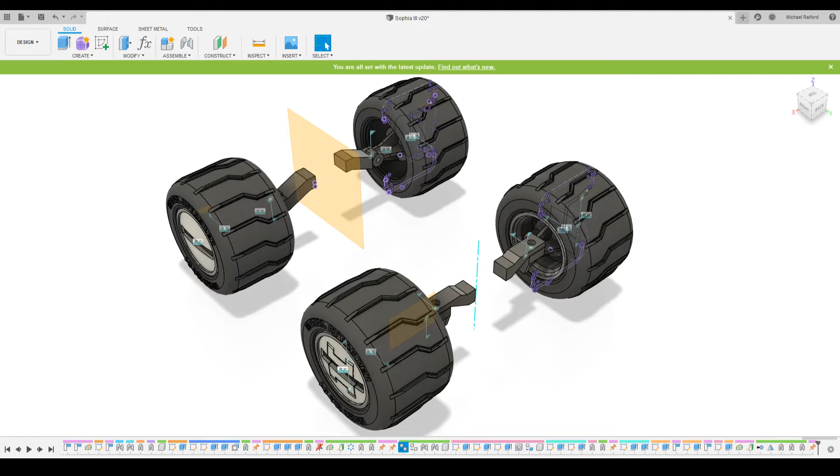Hello out there in the world. I am going to go through this all over again and kind of give an overview of what I'm doing. I don't know if I'll actually do any modeling at this point. I'm just a bit burned out, mostly because I spent an hour talking about this model and going over it, doing one last thing to button things up, and I just discovered that much to my chagrin, nothing happened. So we'll just start at the beginning here.

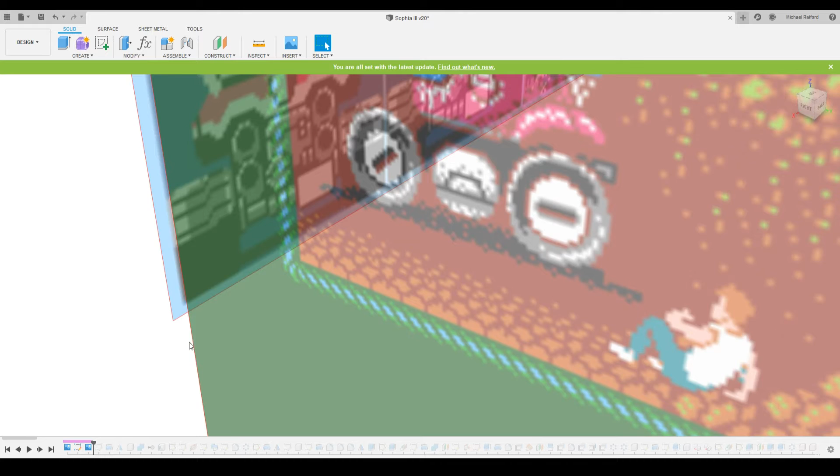I'll go ahead and show you these two canvases here. This is Sophia the Third from the Blaster Master game. I'm a child of the 80s, and this game really, gosh, of all the ways I could waste my youth, this game was it. I spent so much time on this game. It's unreal. Loved it. Super difficult game.

I might do a let's play of this eventually, but it will be cheaty, because yeah, I played it legitimately back in the day, and let me tell you, multiple restarts from the very beginning because you've only got like 2 or 3 continues after you've exhausted all your lives, and it's painful.

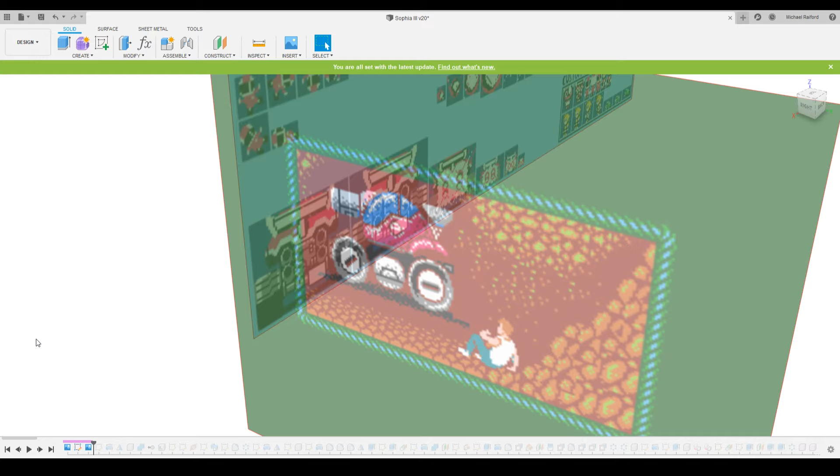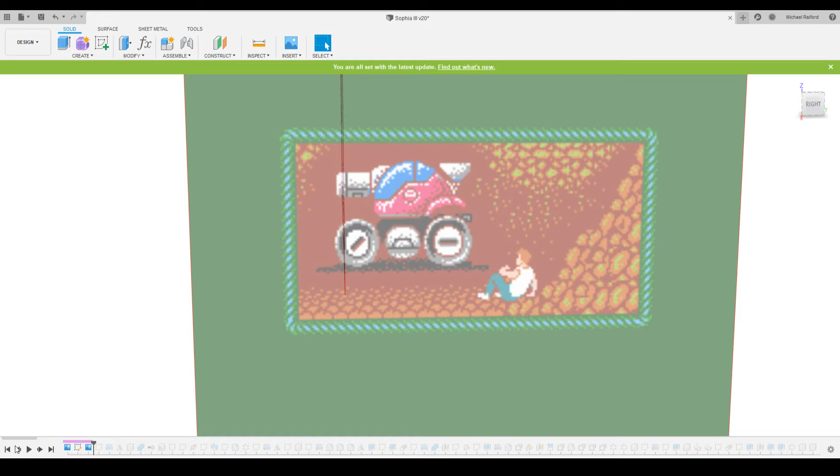But anyway, so this is the vehicle that I've been working on modeling. I've got the wheels done, and I'm going to start working on the chassis, and I'm going to run through this here, and you can see, here's the tire being modeled. I'm going to go ahead and turn off these canvases so they're not in the way.

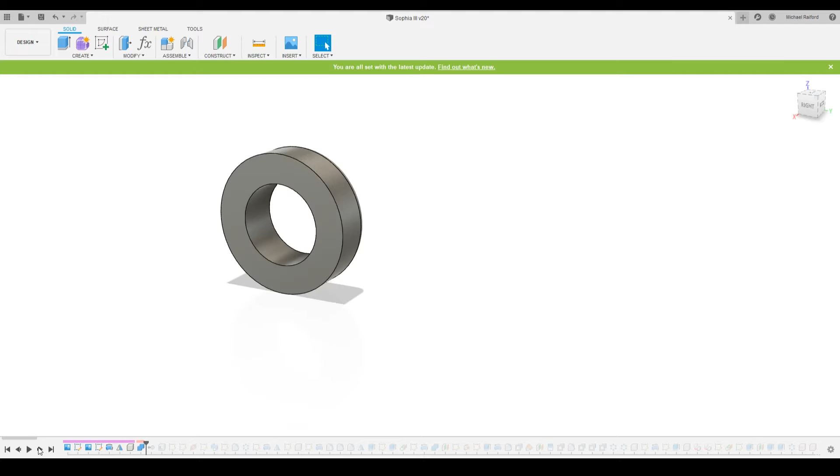So this is the very beginning of the tire. Kind of step through that. That's half of it there. I think that gets removed, yeah. I'll go ahead and re-show that, and I think the hollow, yeah, so it started out as this solid block of rubber, and the next step was to basically hollow it out. So now it's like an actual tire, and this actually fits on the rim.

And when I'm 3D printing it, I really wish I had a way of setting up a camera so I could show you some of this stuff after I've 3D printed it. The material I'm using for the tire is TPU, about 2 millimeters thick, and at that thickness it makes it firm yet squishy, so it's got a really nice feel to it.

This isn't going to be an RC model. I don't have the engineering chops for that at the moment. So it's going to be basically a visual kind of plastic model type deal, where it's just a showpiece to look at. But there's going to be pieces that'll actually roll on its wheels, and you'll be able to manipulate some of the parts, like putting the wheels in different configurations.

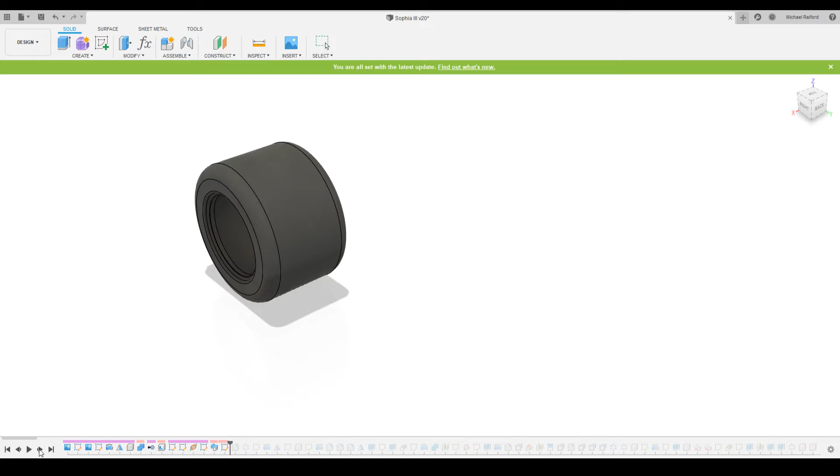So anyway, that was this. So this is the tread design. And if you look at, where is it, I think this one here from the back, you can see that it very closely matches what the tires look like on Sophia the Third. It looks like it might be grooves, but I think it makes sense to me that they would be out.

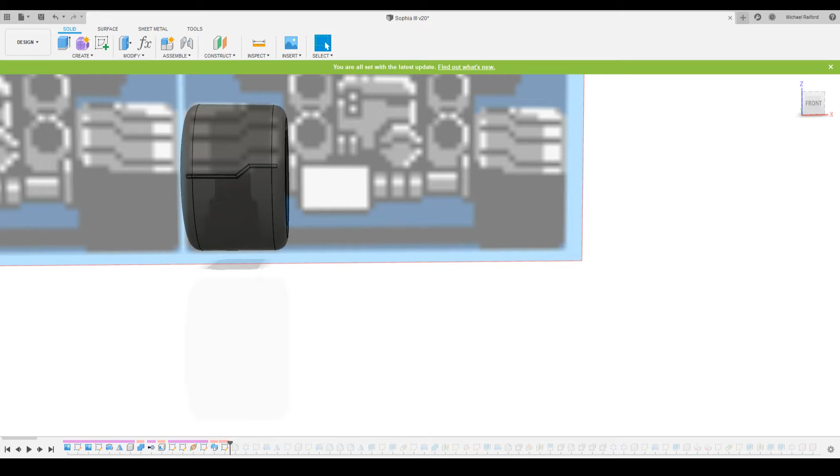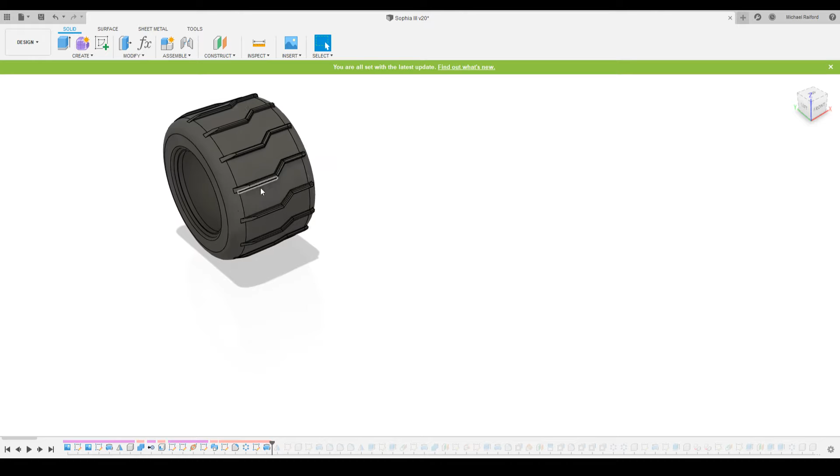Anyway, so that's that, and then we go through and do some modifications to that. So now we've got the circular pattern, so now the tread grip is around the entire tire. Then I created a sketch, and essentially what I did was... I don't know why, let's see, it's just technology sometimes. Okay.

Let me go home it again. Okay, so I don't know why that is. It gets really kind of... It's been acting a little bit weird since this last update.

It's been acting a little bit weird as far as navigation is. I don't know if they changed something with that, but what I did here was I basically blended the tread into the sidewall of the tire, and I'll go ahead and show you the regular shaded without the line, so you can kind of see how it blends into the sidewall there.

And then there's a mirror, so it blends both ways. So now it looks a lot nicer. It's not sticking up at the edges. It actually feels more like you would expect for a tire tread.

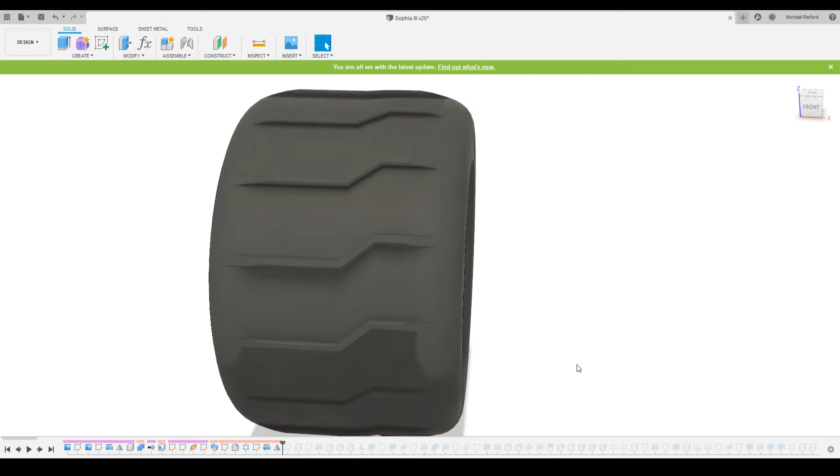I'll go back to the visible edges only view. So continuing on with that, we're building up the rim here, so you can see kind of the profile that I'm going to use to make the rim. There's the first half, and then mirrored at some point somewhere.

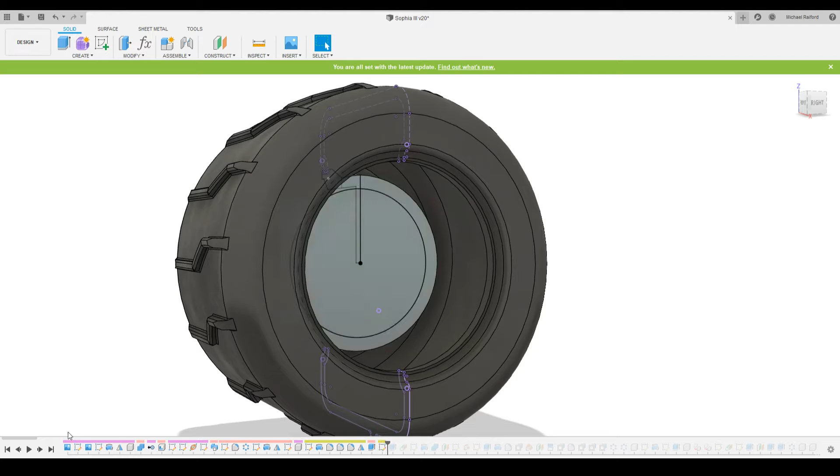There's a bunch of fillets, and then I mirror. And I don't think I have both - yeah, I have one of the bodies turned off. So you have this, it's mirrored inside of there.

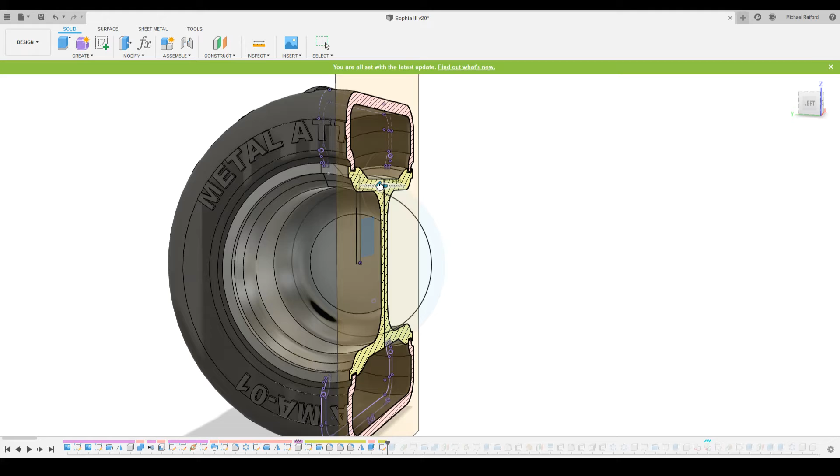I'll turn on the section analysis, and you can kind of see. I want to edit that and move that section plane this way a little bit. So yeah, right about there. It's actually centered on the... there we go. So you can kind of see how the tire fits on and everything.

The tire fits in the groove, and it actually pops on fairly easily because it's a soft material. It's a TPU material. But anyway, this goes a little bit further in that there's a...

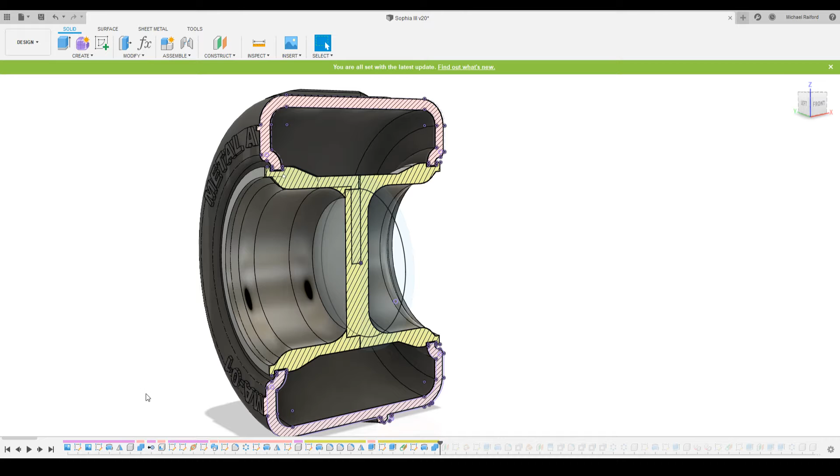Let's see, I think here it shows. Okay, so I've cut out the boss on this side, and there's a little boss here, and this part fits in, and on the side of it, I don't know if it's there yet. I'll go ahead and turn off the sectioning and turn off the tire.

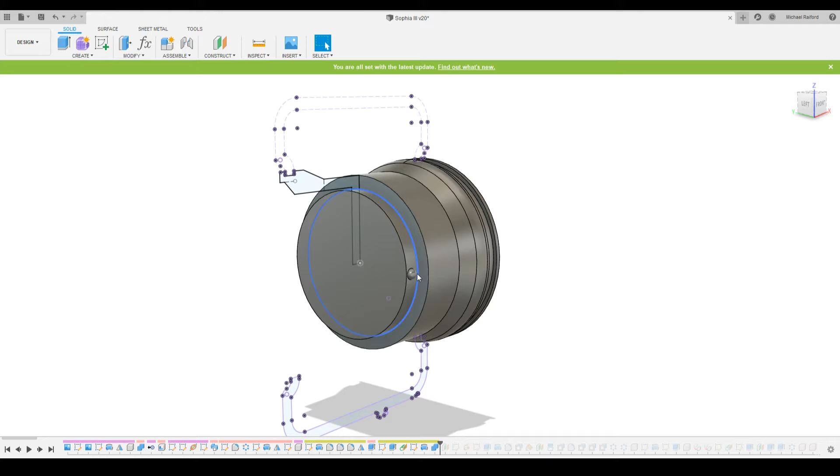You can see you've got this little part here, little tab here that sticks out, and on the other side of the tire I've already done the cut out for that tab as well, and that's going to be extended out. So it's got kind of that L shape, so you can actually lock it.

You push them together and you lock it and you twist it, and it actually locks together so they don't pull apart. So assembly without glue is kind of the goal with that piece.

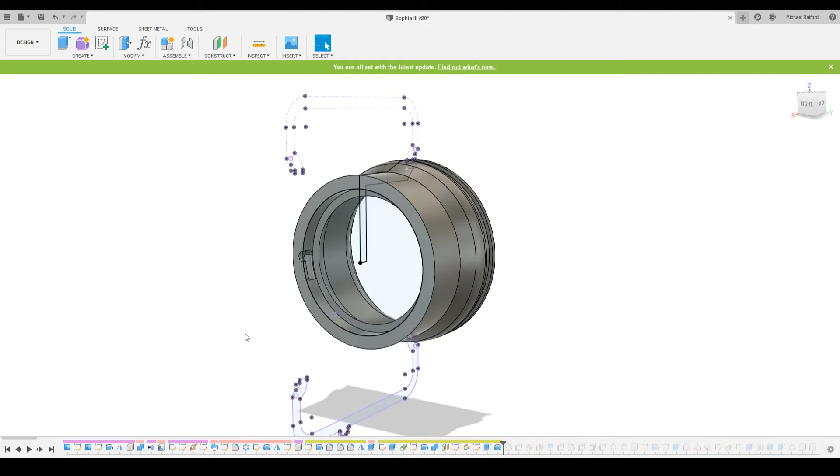I don't know if I'll do that throughout the entire thing, but for this, yeah, I wanted it to be easily assembled. The idea originally was that you could slip one side into the tire into the slot on one side and then push the other one in, give it a little twist.

But it turns out you can't really twist it once it's on that tire. It grips too strongly onto the rim, which is a good thing, even though it's not powered.

But it turns out that it's just easier to take those two pieces, twist them together, and then drop the tire on like you would on any other rim.

So go through there, and eventually we're doing a bunch of offsets. There's a ridge there to kind of keep it once you've turned it. And then we do a circular pattern so that you get - that was for the detents - and then the circular pattern here, which gives you this

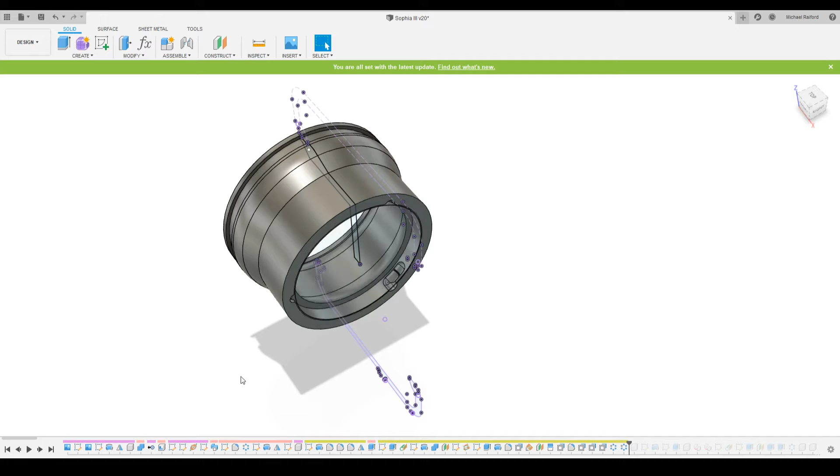twist lock to hold both sides of the rims on, just 3 of them. So 3 just seemed like a good number to use there.

And moving on, I'll go ahead and turn on the other side here so we can see that's the entire rim. There's no hole through it yet or anything like that.

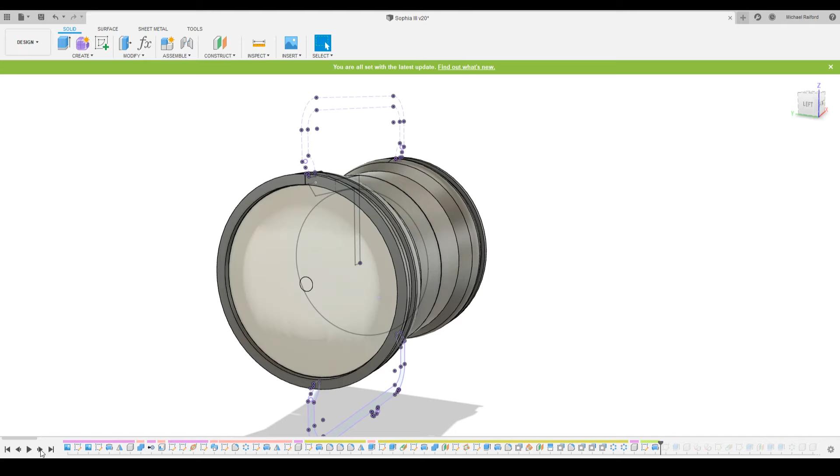And then eventually we build the hubcap. These hubcaps have a distinctive piece on them, which is this little groove in here. It almost looks like the top of a flathead screw.

Hopefully this thing is actually streaming out this time. So it actually looks like the top of a flathead screw, and that's kind of how it looks in game.

So moving right along, and I'm rushing through this time. Last time I spent a good amount of time just talking about it, but I can't be bothered. Let's see, what in the world?

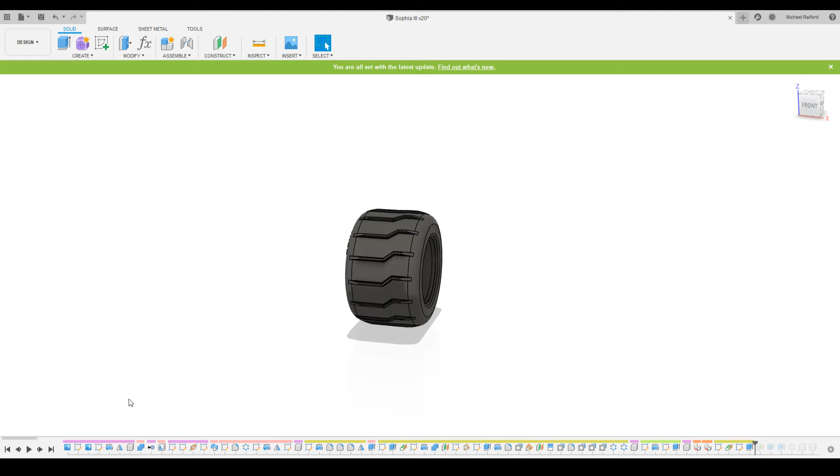At some point, some of this goes on to the other side. I don't know why the rim isn't showing. Oh, there we go.

So some more steps here, and at some point the second wheel and tire is being created here because there's a copy operation in it. When it did the copy, it copied the entire history.

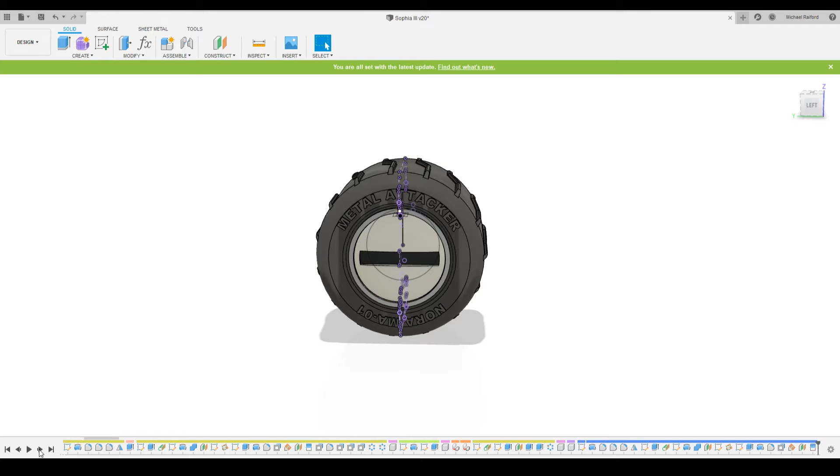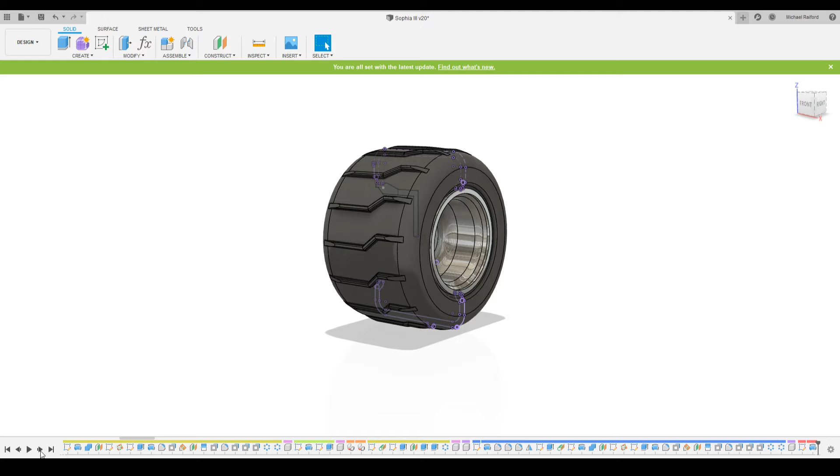So let's just go through that and see. Keep going. I'm not sure where we are now. Let me see, the rear. Let me close up the front so we can see what's going on here. So this is the rear rim so far, and we'll just keep stepping through the history to see how this works out. There's a lot of sketching and stuff like that.

And let's see, hubcap. Okay, there we go. So we got the hubcap now. The rear hubcap is different, which is why this rear assembly is completely different. And there's another difference you'll see later on too.

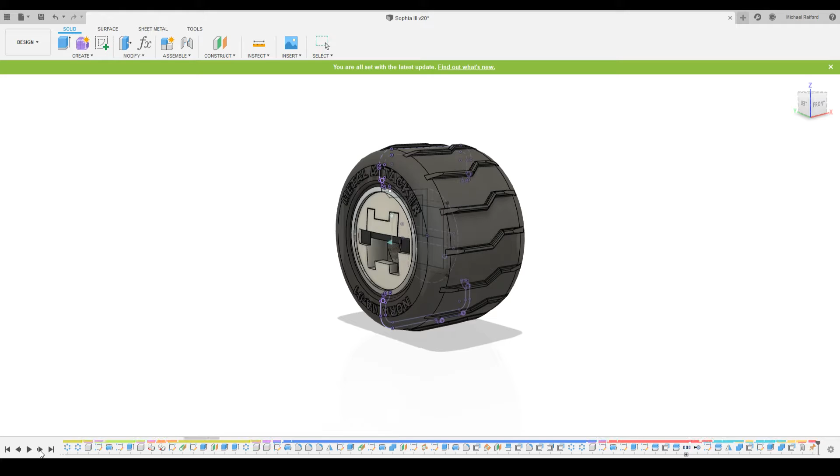And we put the little barn doors in so that it can flip open when it's in its dive configuration. Here I am building out the hinge for this, and as soon as this joint is made I can actually show you that. So these just sort of flip in and out like that.

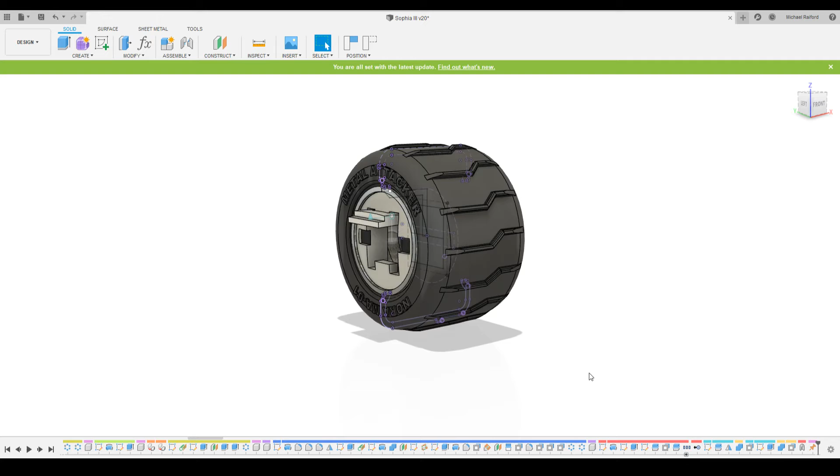So in the game, when the vehicle's in its dive configuration and you're running around in the water, these two flaps open up in the wheel, and you can see them. If you'd see the profile of the vehicle like this, you'd see the little flaps sticking out of the back of the vehicle. That's supposed to emulate that.

So I'll go ahead and revert my positioning on that so I don't mess anything up. Going through, and eventually you'll see that it's flipped out.

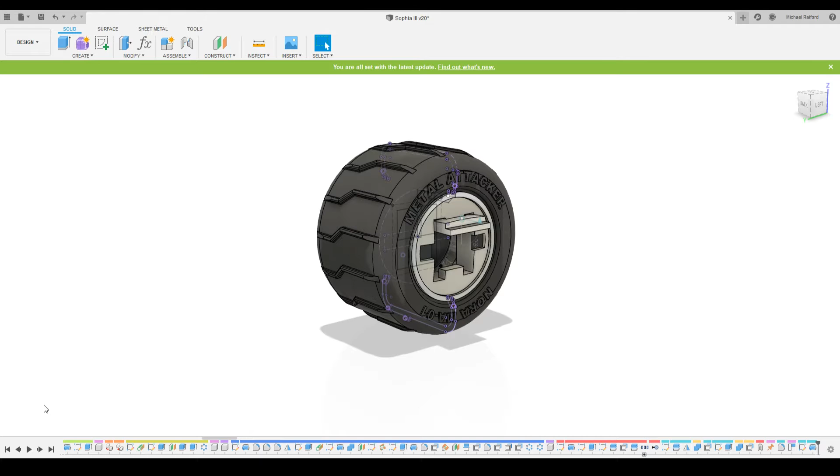What I'm doing is, if I hide this upper, you'll eventually see. I am making a mark for the detents that will hold it open and closed so that they're not just flapping, so there's a little bit of retention there.

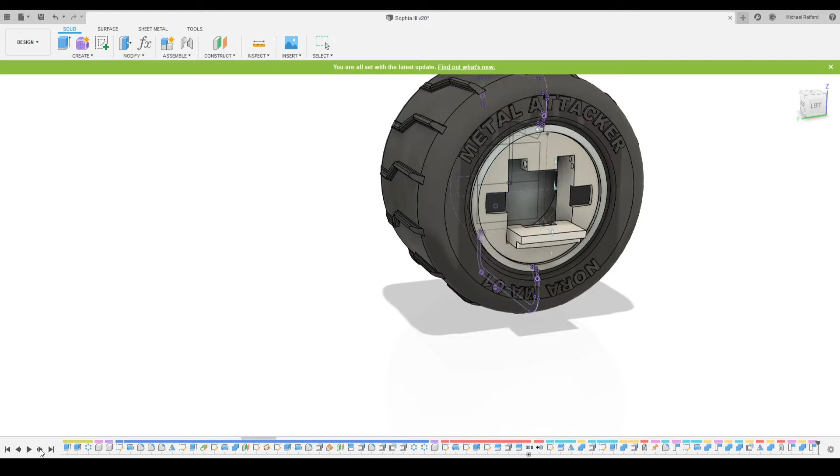And you'll see I've got the marks on the sketch. I've got the bottom side, and I think -- are these? I think these are, yeah, that's already cut out. So that's all cut out.

And you can see the hinge is actually print-in-place, which is something I've not done before. And when I did the 3D print to test if this was actually going to work, it actually worked out really well.

So continuing on, offsetting some space to give some faces clearance. Also, on the tires I've embossed this -- all tires have this embossed branding on the side. So I decided to go ahead and put this labeling on the outside of the tire.

So in the later games like Blaster Master 0 and 02, they call these vehicles metal attackers, so that's where that came from. And then of course Nora MA01, which is the thing that shows up on the pause screen for Sophia the Third in the original Blaster Master game.

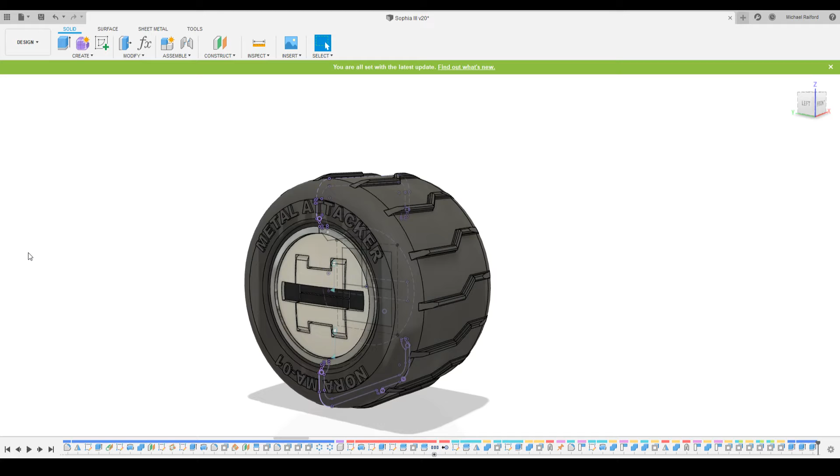So continuing on, what are we doing here? Where's this extrude? Oh yeah, let me hide the tire here. Tire. Let's see. It's the front, it can get a bit confusing. Tire. Okay, so inside here, let me go back a couple of steps.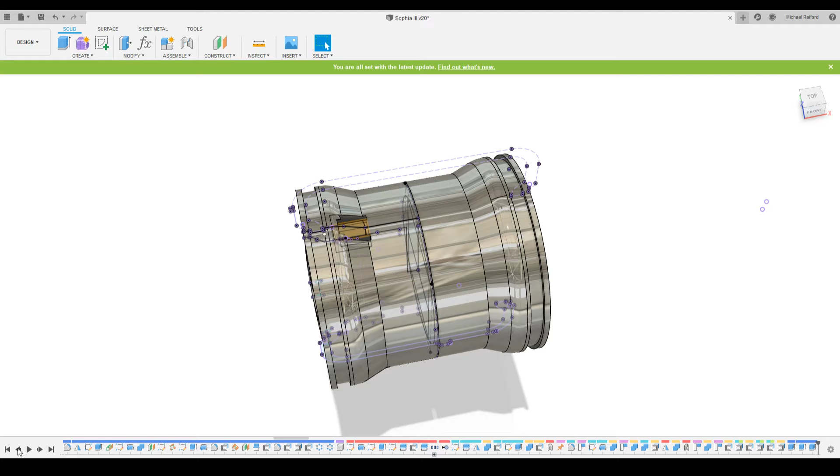So this hubcap -- if I look at a section analysis here -- this hubcap has a little ridge that goes around. You can kind of see it in there. There it is, right there.

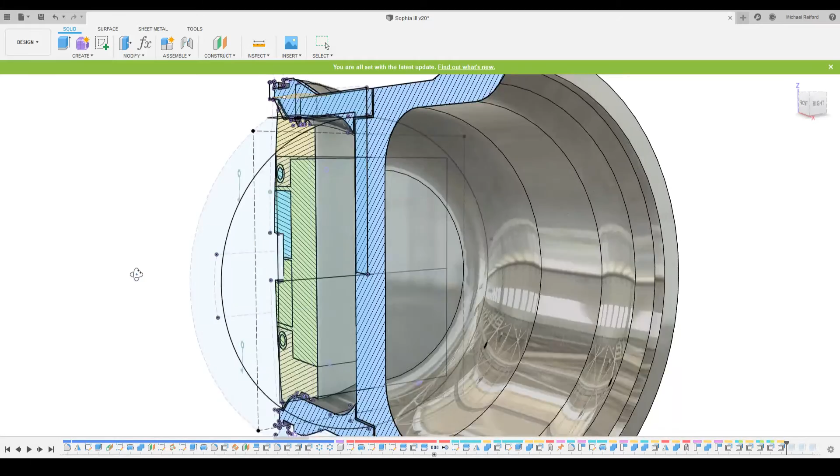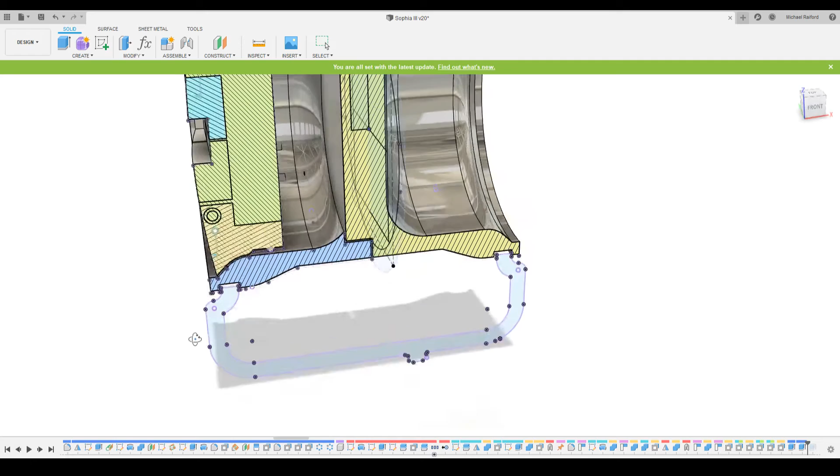And the idea with that is that this has a little tab, and these tabs, if we go back here, you can see that these tabs are kind of separated from the body, and they're a little bit thinner so they're not too thick, so they have some flex to them, and that is what's used to retain the hubcap.

So you can actually pull the hubcap out. You can click it in there, and again, no adhesives necessary. It's got a very positive click to it, so it holds really nicely. Let me go ahead and turn this sectioning off.

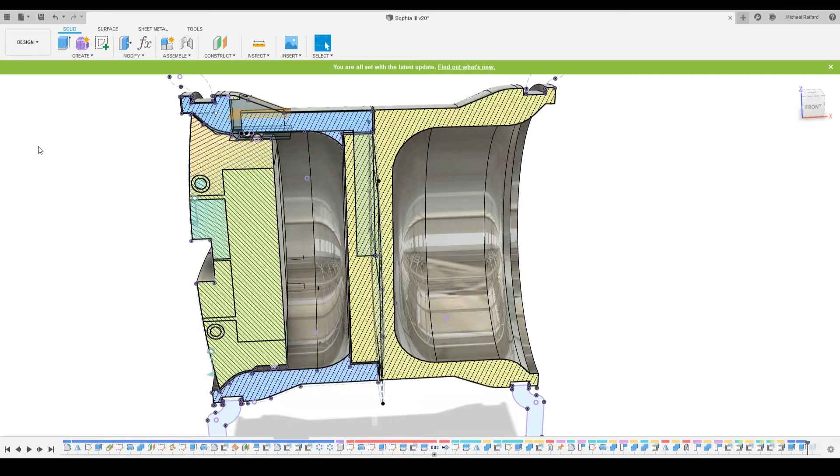So got that done, and then moving further through the history here. So what is going on here? Let's see, that's the tire. Okay, so front rim assembly, hubcap, frame, upper, lower.

I think this is, yeah, this is all the other -- I think this is for the rear side of it. Let's see. No, that's the rear hubcap, that's front. Let's see, we'll hide the front for now.

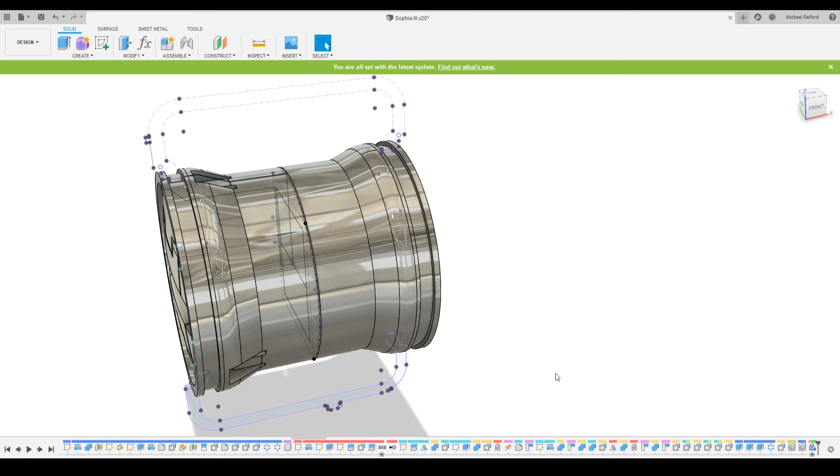Left or right? I'm losing it. Okay, where are these holes going? Oh okay, that's the screw hole. So yeah, now I've bored the hole through it there. So capturing some positioning.

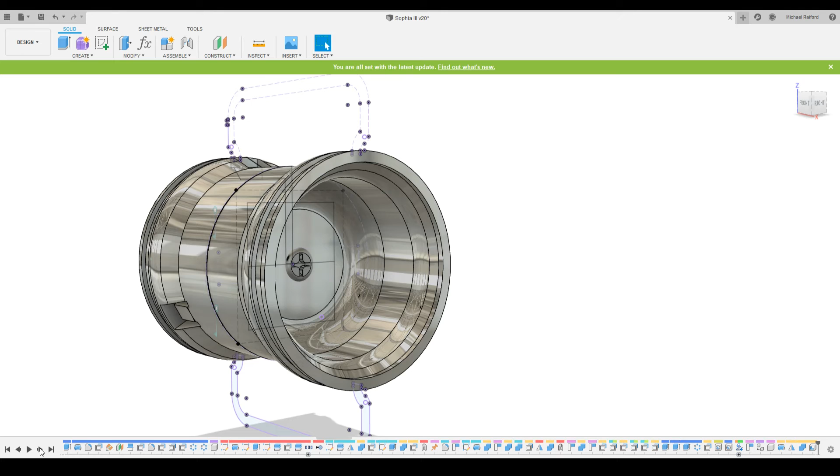Let's revolve -- what is this? Okay, so this is now we're doing the new tire. There's the new tire. Moving forward, kind of the same deal. And you'll see the reason why I am recreating the tire here -- there's the lettering on this tire.

And just keep going. Sorry, my voice is just all of a sudden really crackly.

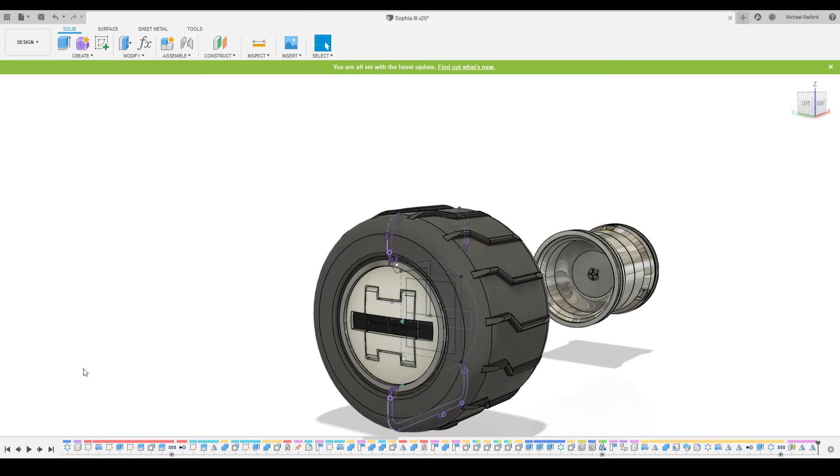Okay, let's see, so that's the right tire, left tire, not quite there yet. Okay, so we continue. Let's get that front rim on.

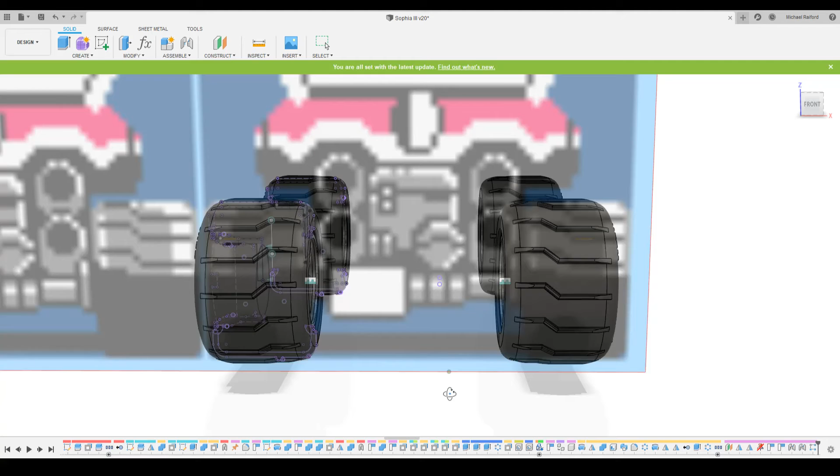Okay, so now we've got the four tires. You may have noticed it on the canvas of the Sophia the Third from behind. The tires are going right through that at the moment, but you can see it on this sprite better. See how the tread pattern is actually mirrored.

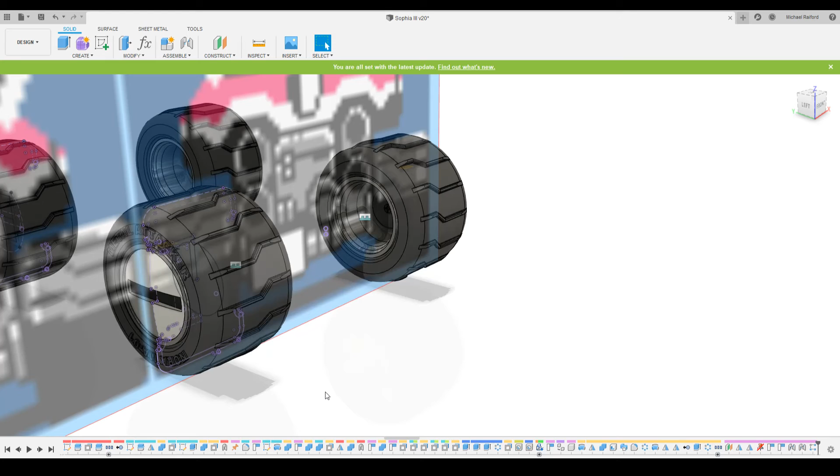Now, if I mirrored the tire in its entirety, the wording would be backwards. So the wording actually had to be rotated around and reapplied 180 degrees on this side. That's why I didn't directly mirror the tires, so the wording looks right on it, as well as the tread matching up with the actual thing.

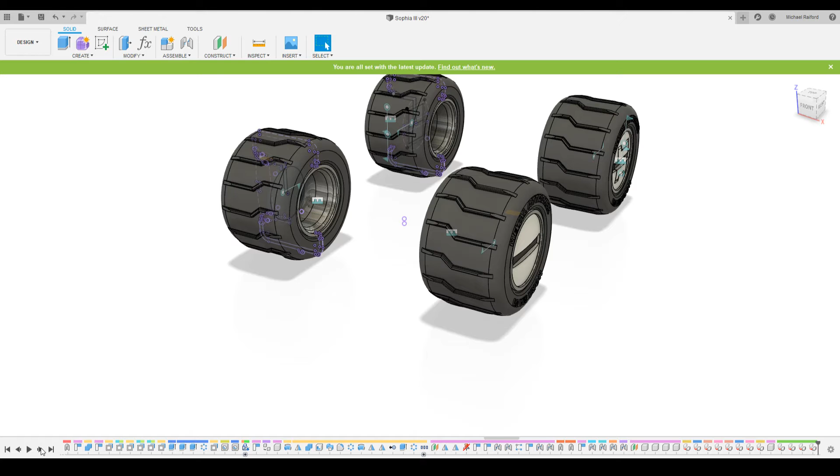And so continuing, it's more a lot of getting things jointed, capturing positions, got the screws, getting those with revolute joints on the wheels themselves, more and more component organization there, and getting the hubcaps on the other side.

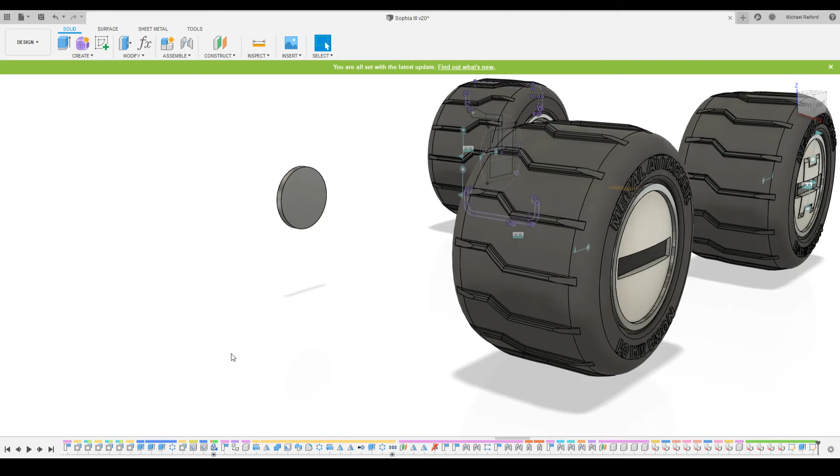I think now we're doing the little hub in here, so let me go back to wheel, front right. So this is the hub as it's being built here, and there's a little boss for the screw to go into, and then the screw. I tapered it a little bit, give it a little bit of draft just to give it a little bit more strength on the base.

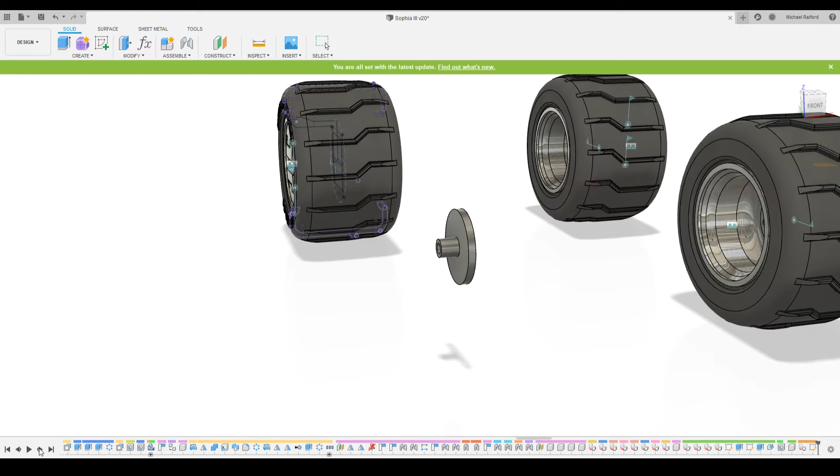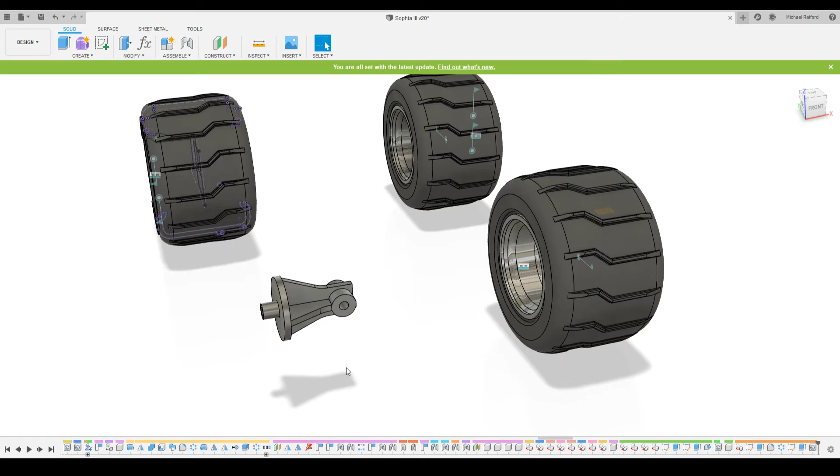So keep going with that, and eventually this thing is basically just these four little fin shapes coming out, so it's strong yet light, and then a little boss for the screw. There's a self tapper that will go into this, and part of that will get cut off at some point, some fillets, and some more adjustment here, and then I've got a mirror plane, getting the hubcaps all taken care of.

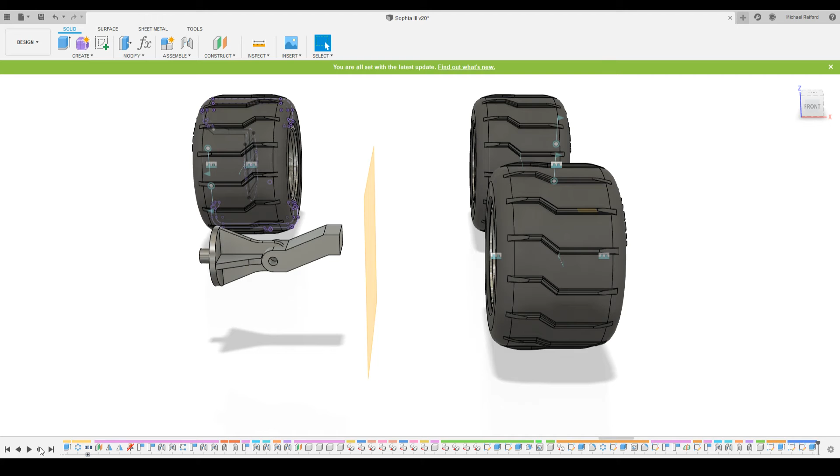And there's an extrude there, but I don't see what it extruded. Okay, let me go back. So we missed something. Okay, so right here you can see I've taken half of that boss away so that there is a space for the next part, which is this arm.

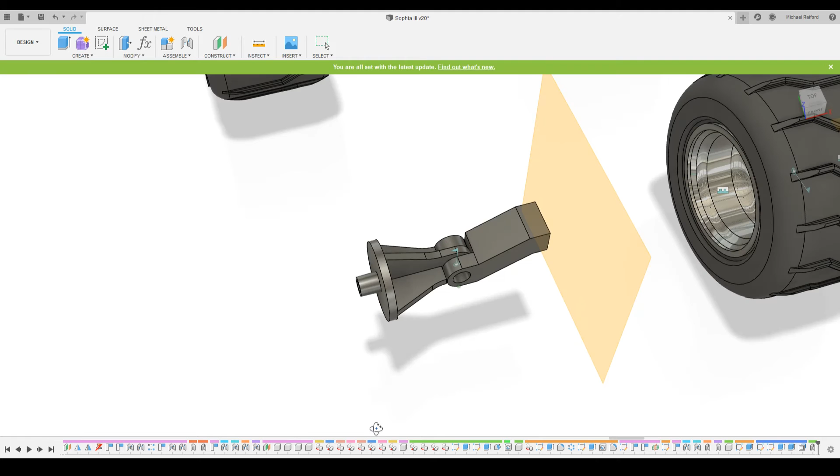There's two extrusions to make this arm. One is the basic shape, and then the other one makes the cutout so that it lines up and attaches, and there will be a screw that actually holds that together, widening the hole so it doesn't have to drill the threads through that, because I don't want both of them to be threaded. I just want this side to be threaded. And all the screws I'm using are M3.

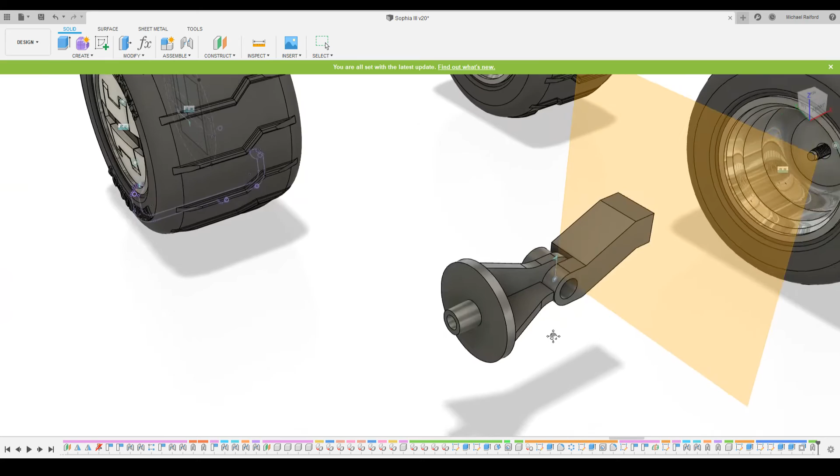And here we go again with frustratingly slow. I don't know why it does this. Let me rehome again, and then, now I can rehome, zoom in, and I'm fine. But for some reason it gets really slow all of a sudden. So just—

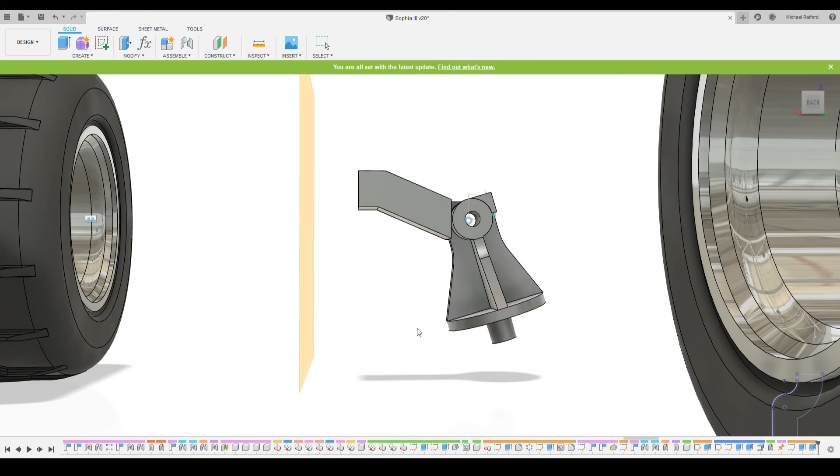These extrudes are the same. Okay, so on this side I'm actually adding physical limits to this joint, and I don't know if I've got it set. Yeah, so I've got the joint limited in software, but I'm adding a couple of pieces here, like this block here, to keep it from going any further up.

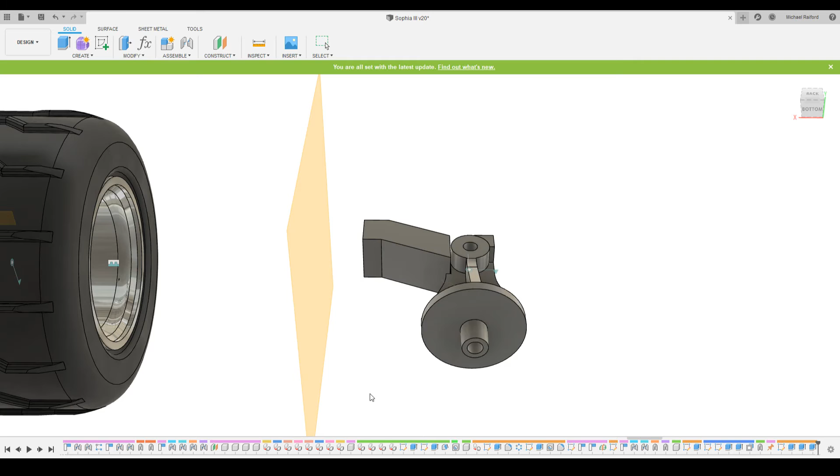And then there's a block that you will see, it's actually already kind of there, but you can see that cuts in, so I need to cut out a piece there, which is what that next extrude does, is it cuts that piece out, so that just slots right in there, and that keeps it with a 90-degree range of motion. So there's that.

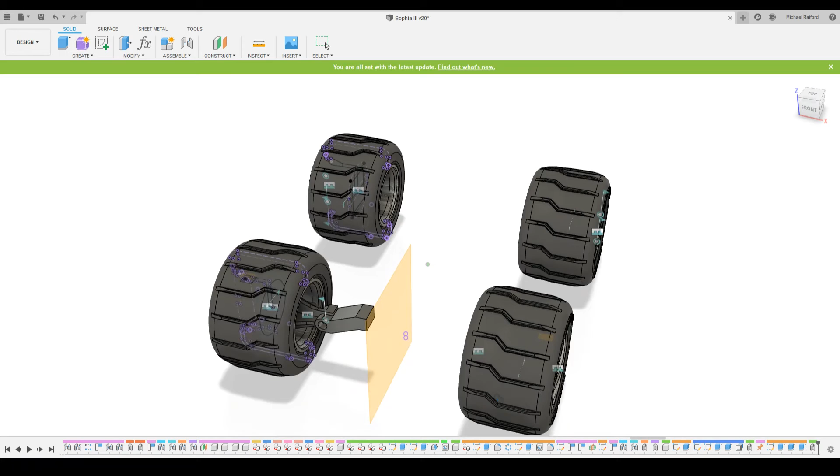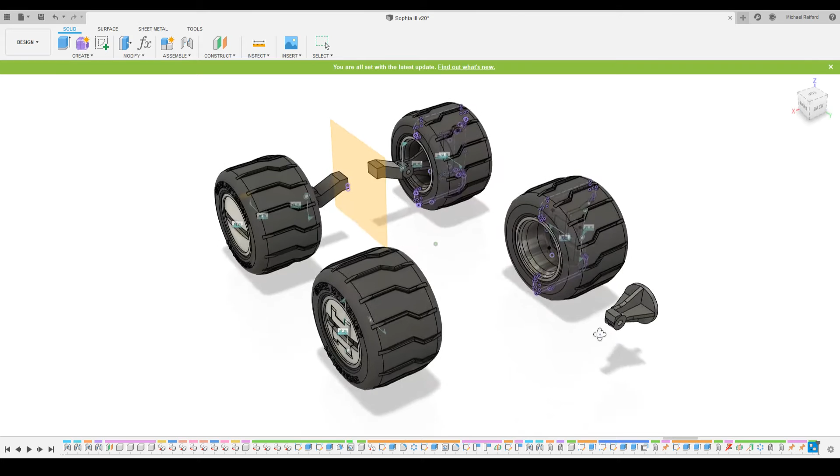And so more joints. I'm going to go ahead and turn back on that wheel assembly there. So that's one part of the chassis, and then using a circular pattern, I duplicate that over to this side and do some more joint setup, and I'm grounding things again. And then I move things over to the back and start putting things together in the back.

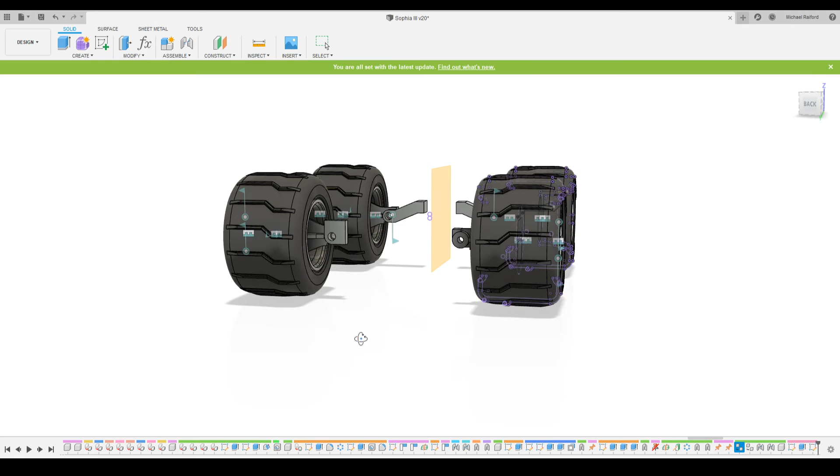Very similar process here, making sure everything's jointed up. I did have a joint that wasn't made in the back that I wound up having to remake. So then this piece here is very similar to these arms in that it allows the vertical rotation of the wheel so that it can be pointed down, like when the vehicle's in hover position.

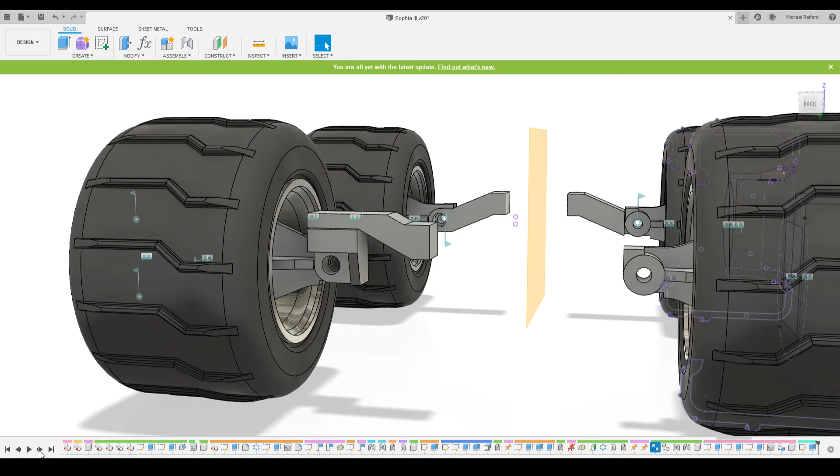And this basically has the same kind of range limits. Just kind of making this piece out. And so this top piece here is the horizontal rotation, which will allow the wheel to swing back.

So it looks like it's in the dive configuration. At some point I add joints. There we go, there's one joint, there's another joint. We got all these joints set up, and there were a couple of extrudes on this side, this pin here. I think if I drive this joint here...

So at 0, this pin here will prevent it from going any further forward, but this needs to be modified, and you'll see how it gets modified. So we modify it, and then at this point we capture position with the turn back, so we can get the other limit on it. So that limits it from going too far the other way around, and we move it back.

So now the limits, if I click on this again, you can see that physical limit is kept by that one little tab that sticks out there, which keeps it from spinning too far. I'll go ahead and undo that.

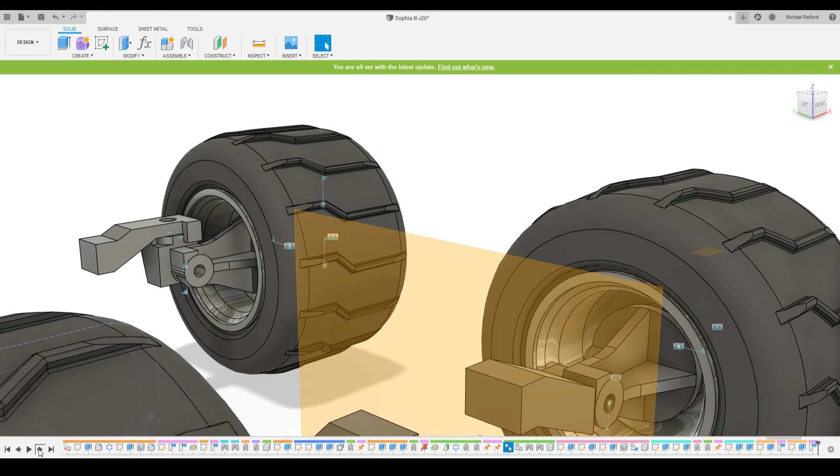That was the point I was at before I started the last stream, because YouTube decided not to actually stream for me. So this is what I did during that live stream that was never actually live.

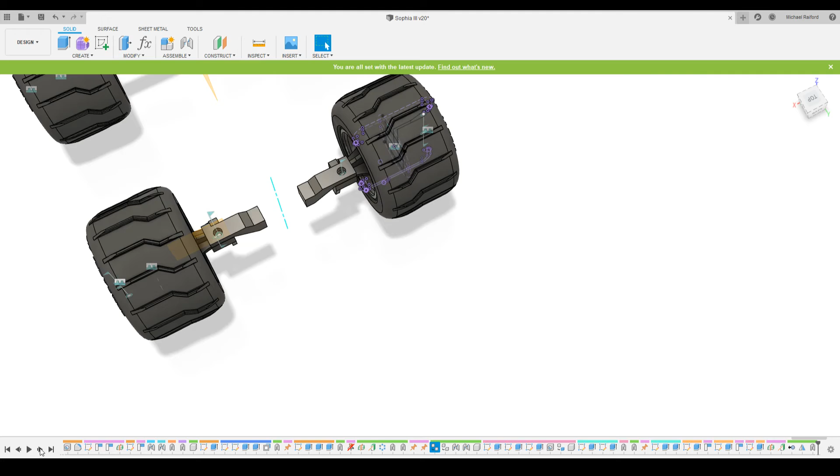So I made a mirror plane here, and I thought I was going to just rotate this around. Well, it turns out that wasn't what I actually wanted to do. You can see here, whereas the other one is rotated, because there's no directionality front or back, you can do that and it's fine. But on the back here, you actually have to have these swinging toward the back, so I had to make sure it wasn't a rotation, it was the actual mirror.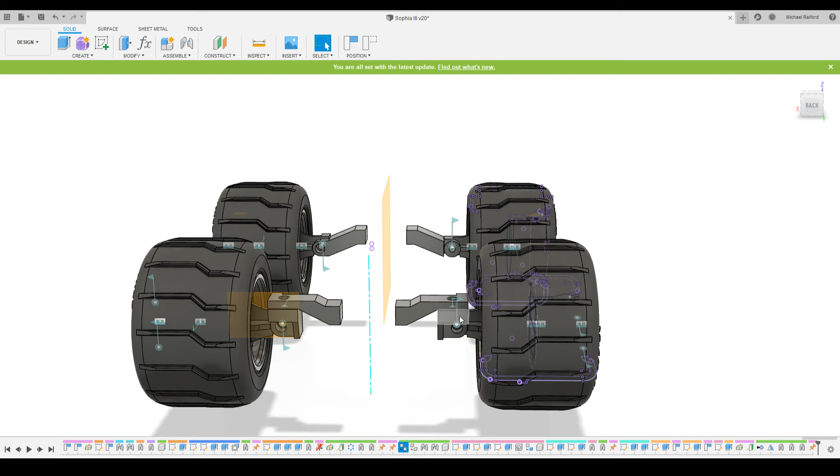So I got that mirrored, and then added all the necessary joints and grounded this piece. You can grab the wheel here, grab this little thing, and these will now flip back, as you can see. I'll go ahead and revert that, and they will also flip down. Oops, grab the... see, can I make it flip down, please?

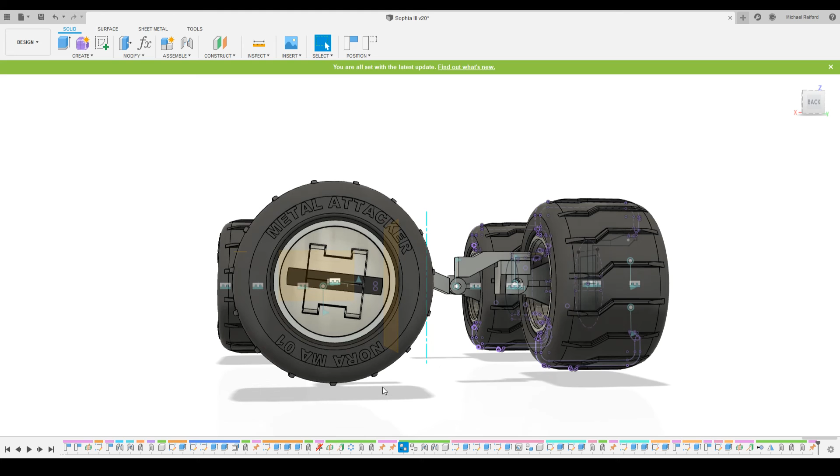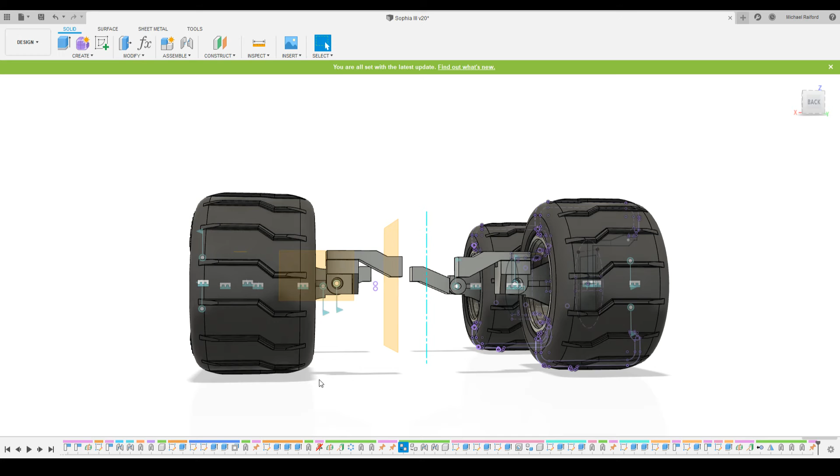No? Oh, revert. I'm going to have to drive that joint by myself. So, yeah, you can make it flip down. See, can I actually grab this one and make it flip down? No. See, now they can all flip down or flip toward the back. That's where I was when I thought I was actually streaming, but I wasn't actually streaming.

So, sorry for the kind of hurried, rapid pace fly-through of everything.

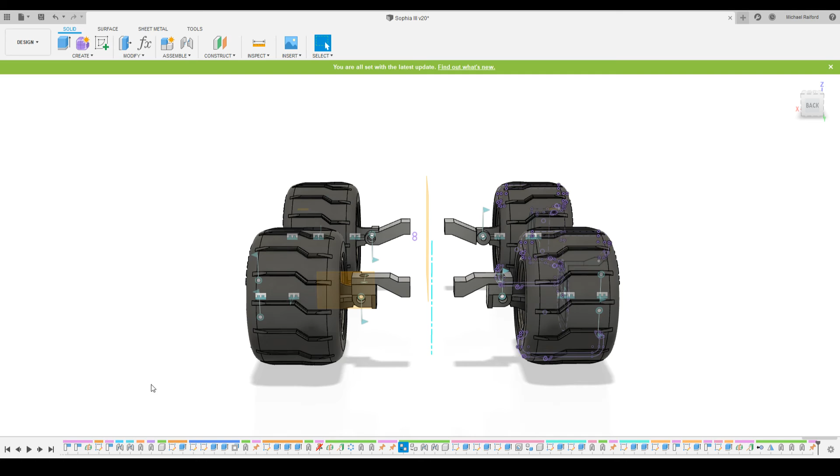But yeah, so this is where things are right now. Eventually, I'm going to get the backbone here. There's going to be a set of arms that come out, come up toward the middle, and those will allow the wheels to swing down and up.

I'm thinking about maybe making a mechanism that keeps the front and rear sets at the same angle, same degree, by using something like a set of teeth, basically a partial gear that would go in this area that would allow them so when I pull down on one, it pulls down on the other. But I don't know, that's a little bit more involved.

I might just leave it so that the front and the back are separate, so if somebody's picking up the model and playing with it and they manipulate it, they can make it so the body points up or down. I don't know.

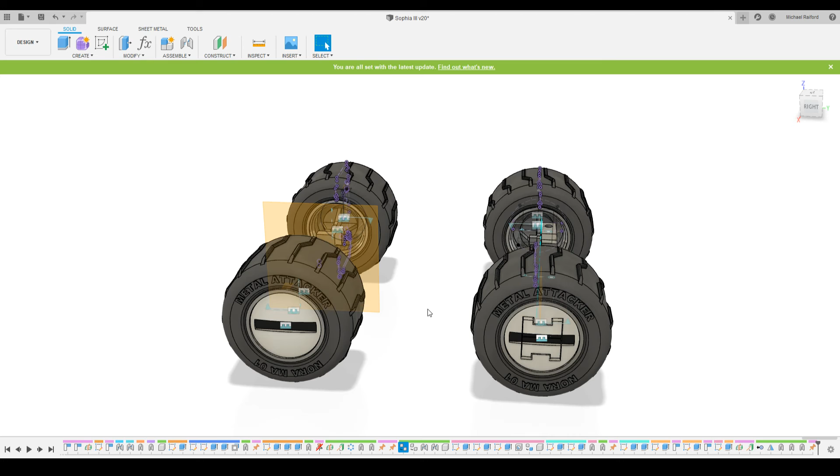Let's see, there's also a consideration on the rear of the vehicle. I think that's this one. When these back wheels are in their down position, I have to be careful about the top exhaust pipe. I don't think that will be a problem. Let me do it orthographic.

Now the top pipe won't be a problem, but this bottom pipe, I'm going to have to give that some thought because I think that might interfere a bit.

I don't know, maybe there's a way I can get around that. It's not going to interfere by much, and I might just be able to fudge the sizing of the pipes a little bit so that they don't interfere.

Then as things go on, I'll be doing the bit of stuff with making the axles and stuff. So it actually looks like it has that little axle that shows up in the back, and then the back of this thing, and all the little gadgety type things here, and then building the body on top of it, which has good clearance between the wheels and itself, so that's good.

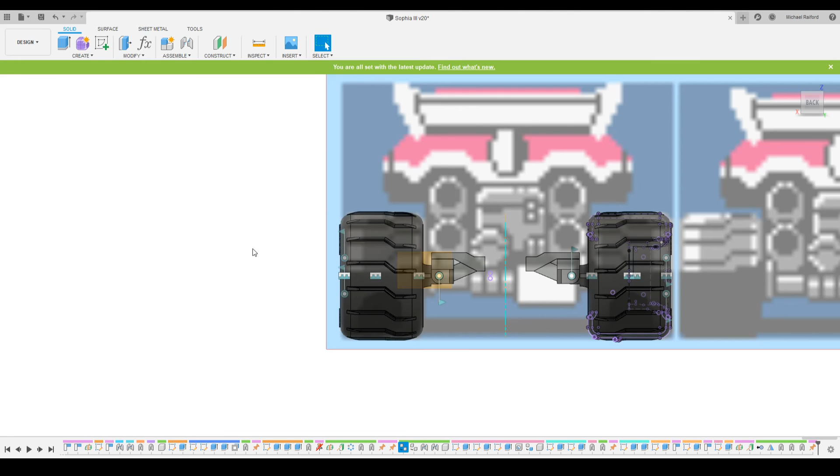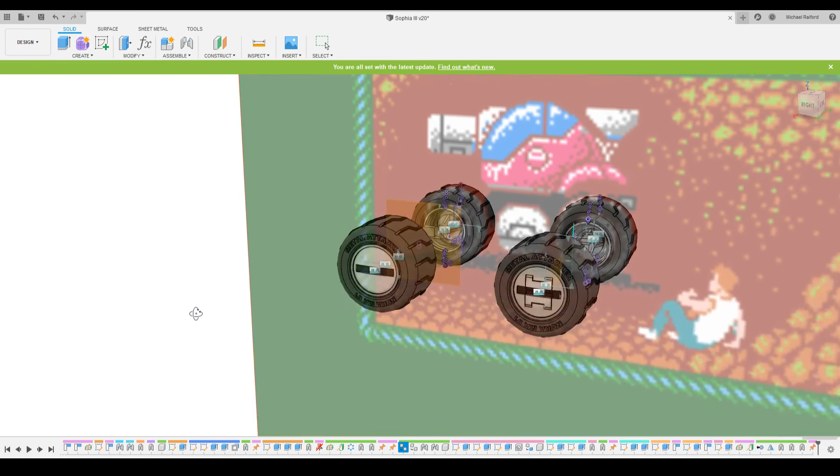And this isn't going to be a remote control vehicle by any means. Like I said, the mechanics of that is, I think, probably a little too involved for what I'm doing and my level of skill at the moment. But it'll be a pretty cool model that you can pick up and kind of play around with.

But man, it'd be so cool because I know there's a company out there that makes little RC cars that can run up walls and on the ceiling. It would be so cool to have wall-climbing ability on this RC car, and the hover ability too, and then some kind of water propulsion system.

I'd imagine the wheel design would change a little bit in the back, so that a turbine and the wheel could spin and draw the water through and give it a little jet of water to push it through the water. That could possibly work—barn doors open to reveal the turbine, and then it just spins the water. It would be really cool to see all of that.

The practicality of doing all of that, I don't know. That would take a lot of work.

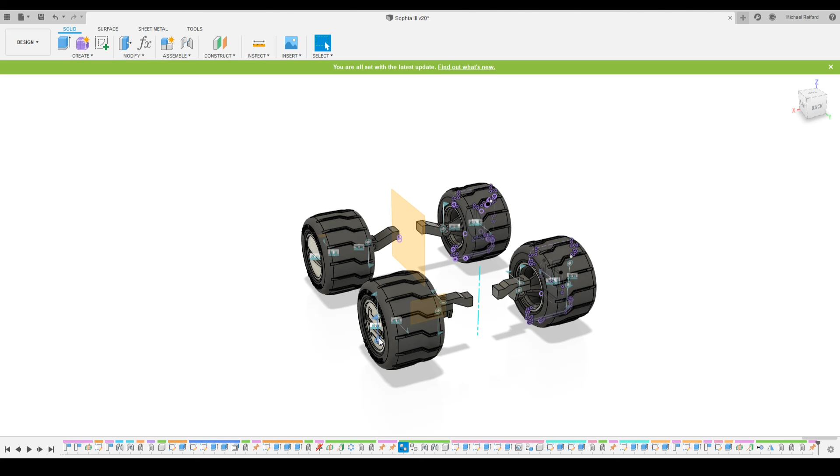I think this build will fit kind of in two hands. You can kind of see here if I look from the front of this wheel to the back of this wheel—what's the length? 175 millimeters.

So the vehicle's probably going to be about 20 centimeters total length. It's not going to be big. It would have to be a lot bigger if I were going to put all the mechanics in it, and I don't have a 3D printer big enough to tackle a much bigger design than that.

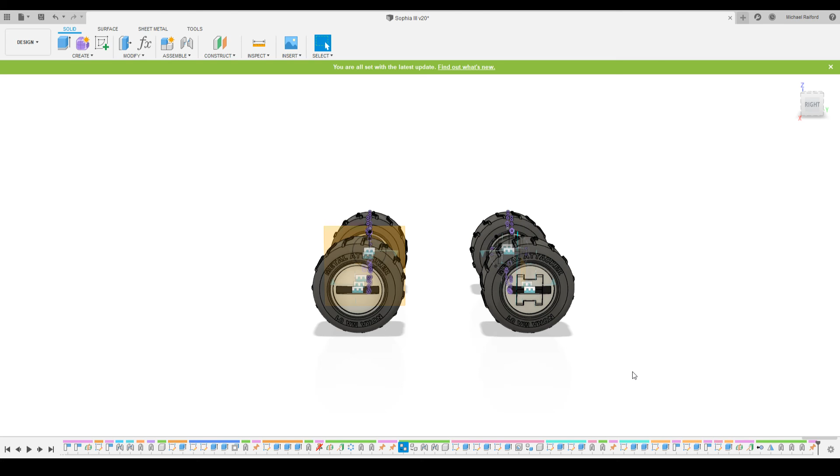Though I could panelize things and glue panels together, and yeah, that gets all really, really messy. But it would be kind of fun to see this thing actually work.

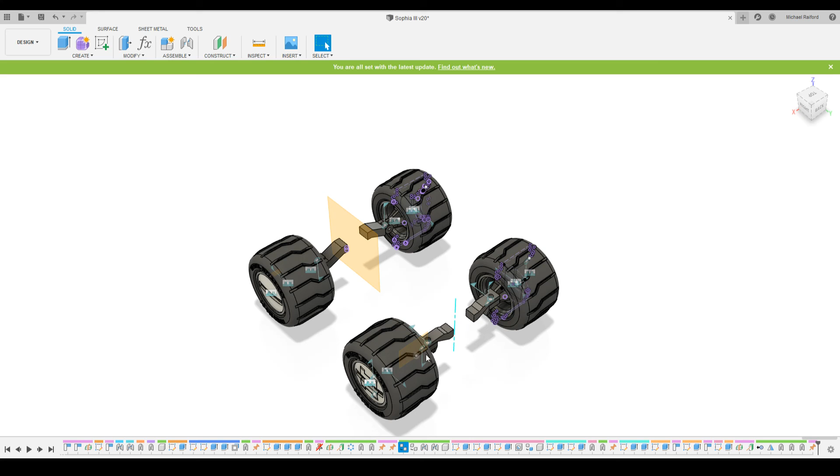The other thing is, I might at some point add a steering system to this, maybe. It would be like a four-wheel steering so that it kind of bends, so both wheels would bend to steer it. I don't know, it's one of those things where you can just hand manipulate the moving parts. You can see it all kind of working together.

I think for this iteration of it, the wheels are going to be fixed in place. And even if I did it RC, there's ways to get around the wheels being fixed in place.

How are you going to steer? Well, you can actually run one set of wheels in one direction and the other set of wheels in another direction, and it'll turn it. Or just differentiate the speeds that the wheels are turning to give it a more gentle turn. You don't actually have to.

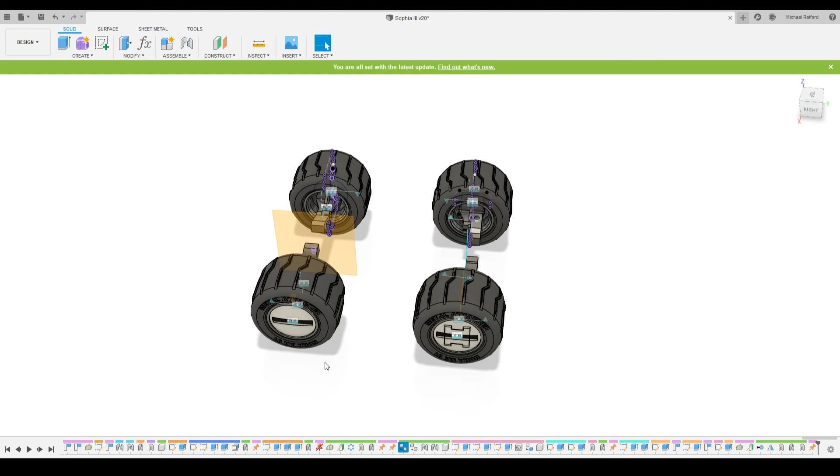Of course, that's terrible on your tires, so you don't do things like that in real life. But for an RC kind of thing, it would be kind of cool. But yeah, that's thinking beyond what my plans are for this. Like I said, I just want a neat little model that you can pick up and manipulate and fool around with. So that's essentially what this is.